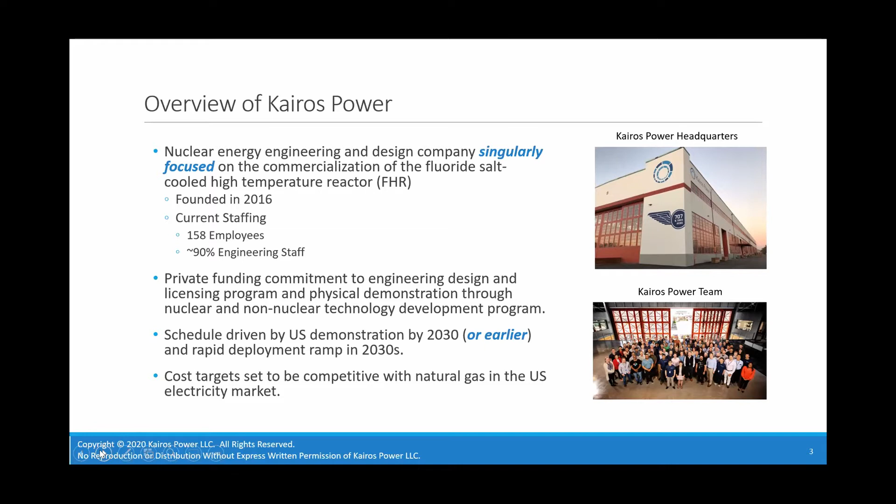Overview of Kairos. Pretty new company, founded in 2016. We've ramped up to 158 employees, very engineering focused. We're privately funded and schedule driven to deliver a demonstration plant by 2030 or earlier. We also are very cost conscious and realize that we're going to have to compete in an aggressive marketplace.

So Kairos is Greek for the right or opportune moment. And the founders recognized that this incredible peak of natural gas build out in the early 2000s was going to result in another peak of generation retirements, probably around 2035 or so. And we want to have a technology that's ready to answer that upcoming peak.

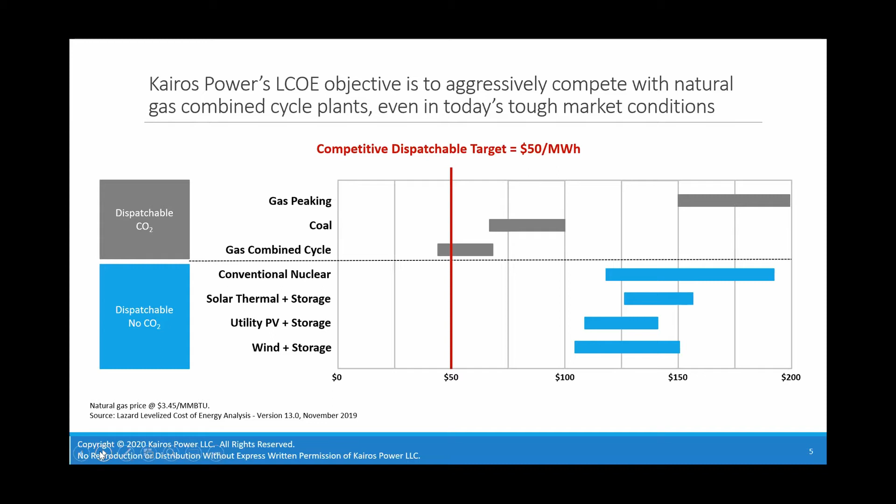We also realized that we have to be aggressive and compete with natural gas basically today. Things don't change in tough market conditions. So we're targeting at least a competitive dispatchable target of $50 per megawatt hour. And we think we can do maybe a little bit better than that, probably in the nth of a kind.

Our technology is based on particle fuel, TRISO, and FLiBe coolant. And I love this picture because that's my FFTF core before it was filled with sodium. But those two, the fuel and coolant combination, allow us to have a functional containment so we can have low pressure reactor vessels, low pressure systems, and we can avoid costly containment structures.

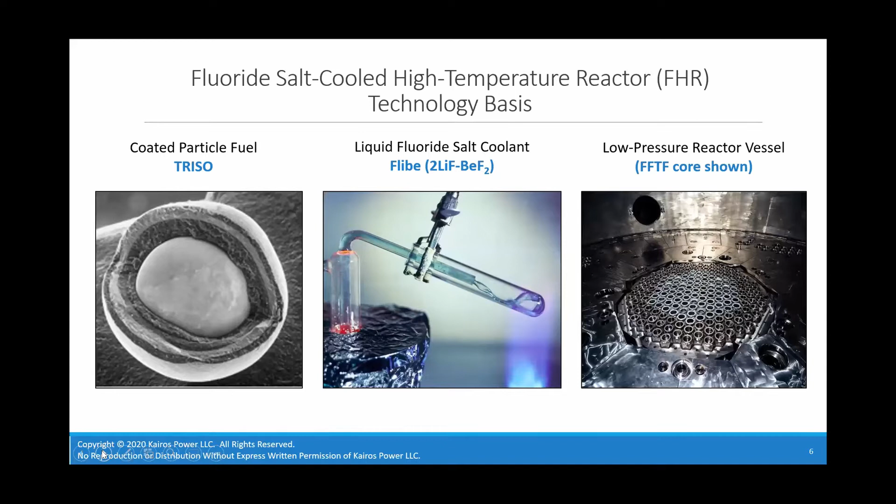We've done quite a bit of design work on the full-scale reactor, which would be 320 megawatt thermal, about 140 megawatt electric. We haven't really designed all the BOP yet, so we don't quite know all of the parasitic loads. 100 degrees C delta T with an outlet of 650, probably about 6 inches of water or so cover gas pressure, and we need HALEU fuel.

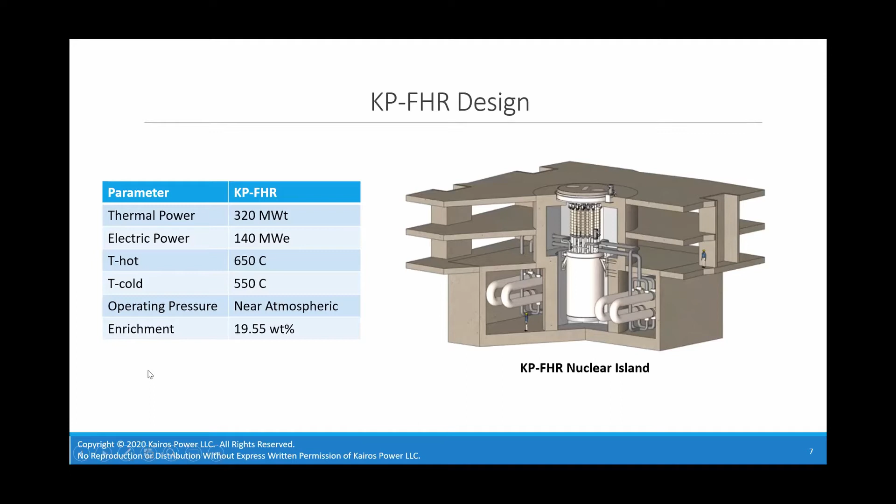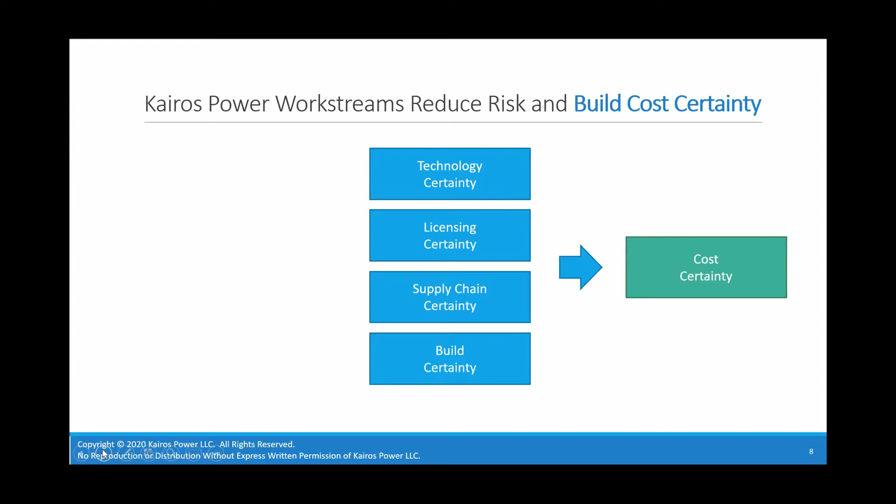So the main focus of all that we do is to build cost certainty. And in order to build cost certainty, we think we need technology, licensing, supply chain, and build certainty. And from that, we build our work streams at Kairos, which are the design, test, licensing, fuel development, salt development.

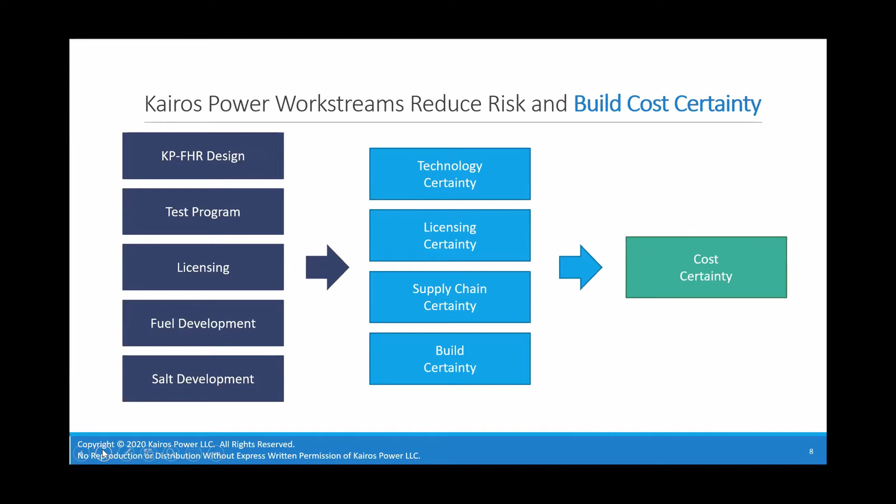So our system involves this sequence of non-nuclear development facilities: the rapid analysis prototyping iterative design lab, or R lab, salt handling lab, or S lab, the component testing facility, or T facility, which would be full-scale components, and then the user facility, or U facility, which we plan to be a full-scale replica of our commercial nuclear primary system, including the civil structural.

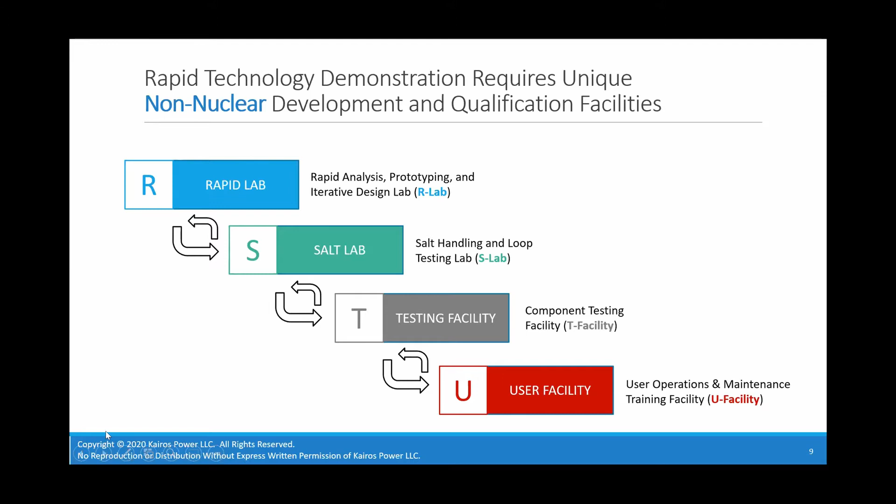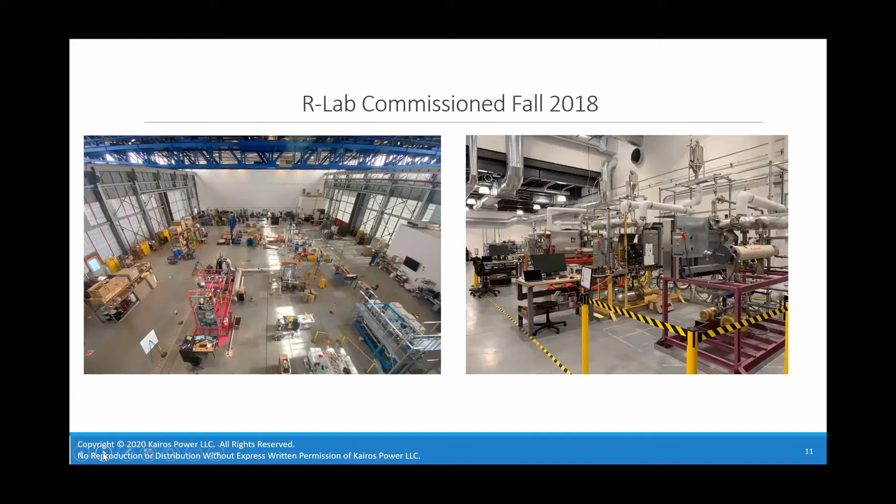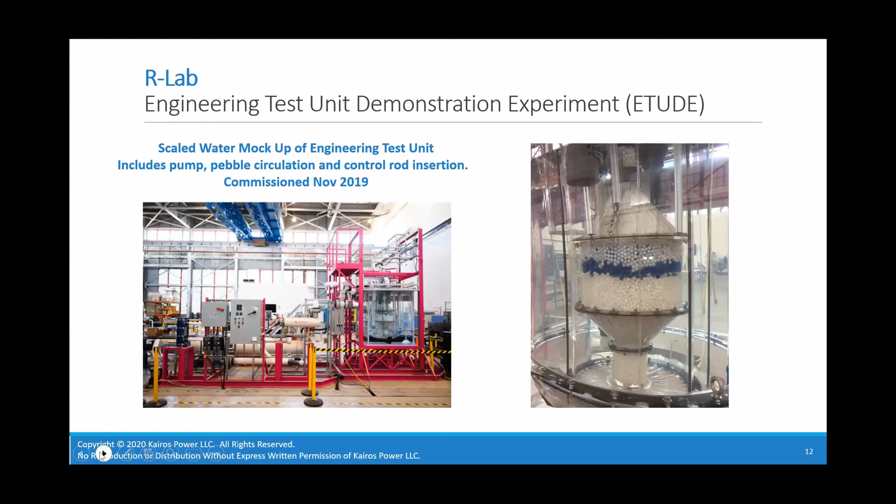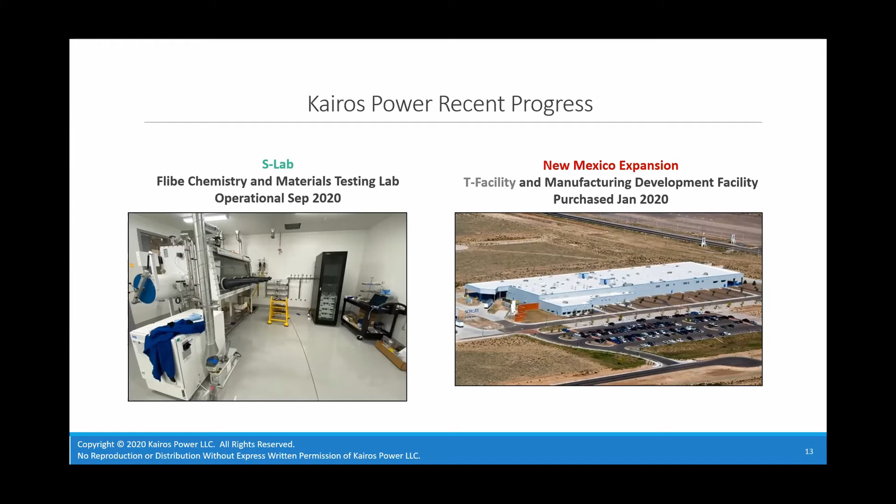So Kairos Power is taking a different approach to nuclear. We think nuclear has to be done really drastically different than it has in the past. And in the past, we've had long development cycles where you make a lot of paper that gets increasingly more complex and intricate and harder to change. You probably hook up with an EPC sometime after you've almost designed, close to finished. You find out that the cost estimate is undesirable. And so you do a power uprate to try and improve your dollars per megawatt ratio.

And then you go out to the field, finally, with paper that's really hard to change because you have a license now. And you find problems about how you can't build it the way you thought you could. And so we tried to break that down into small sprints, very near term, hardware focused sprints, so that we can really learn by doing, learn fast, learn cost control, and also to expose the real risks rather than try to contemplate what risks might be there and then track a whole bunch of them. Some of them come to pass and some of them don't.

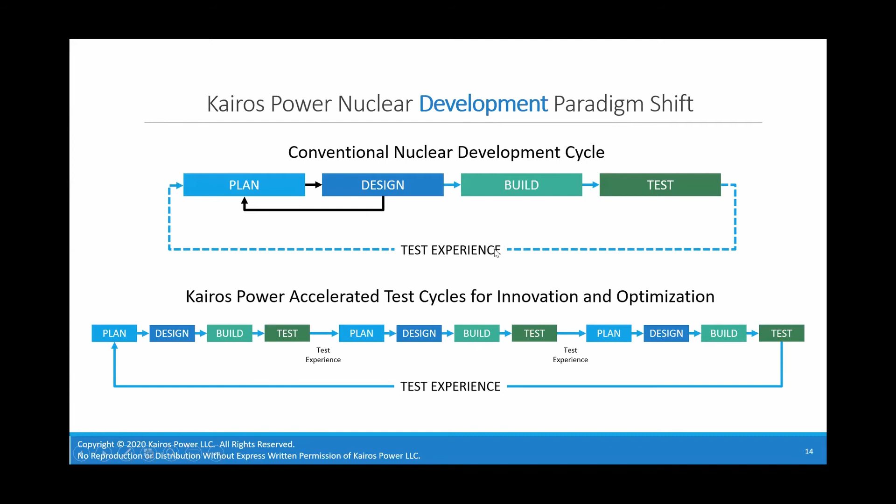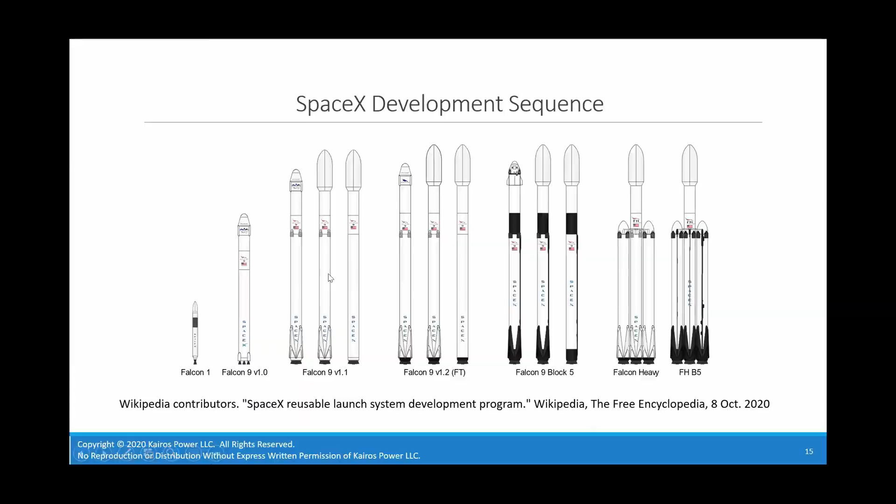a little bit. And this really helps us to develop our supply chain, to practice and improve our design and testing programs, to give us experience in operations of a large-scale FLiBe facility, and will give confidence in our ability to build and operate high-temperature FLiBe systems. So it's not really just a test of our technology and our components, but it's building muscle of our company and our people and our programs and systems, and how we can be successful in actually putting hardware into operation.

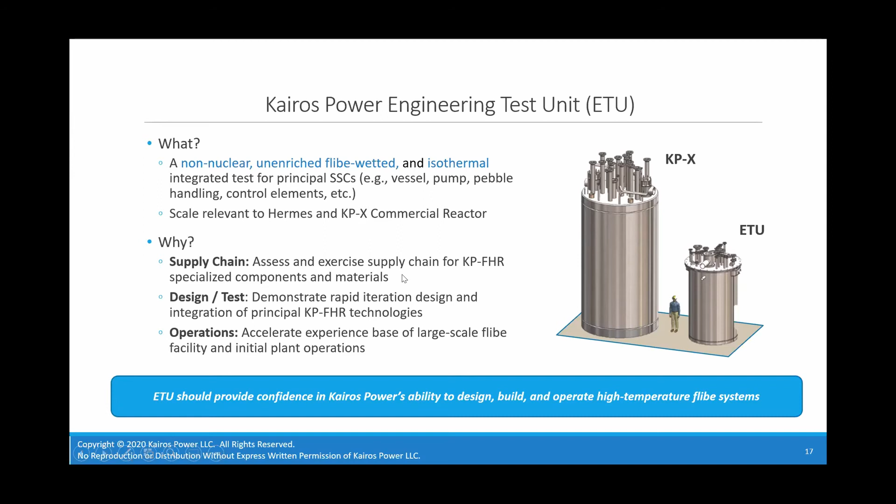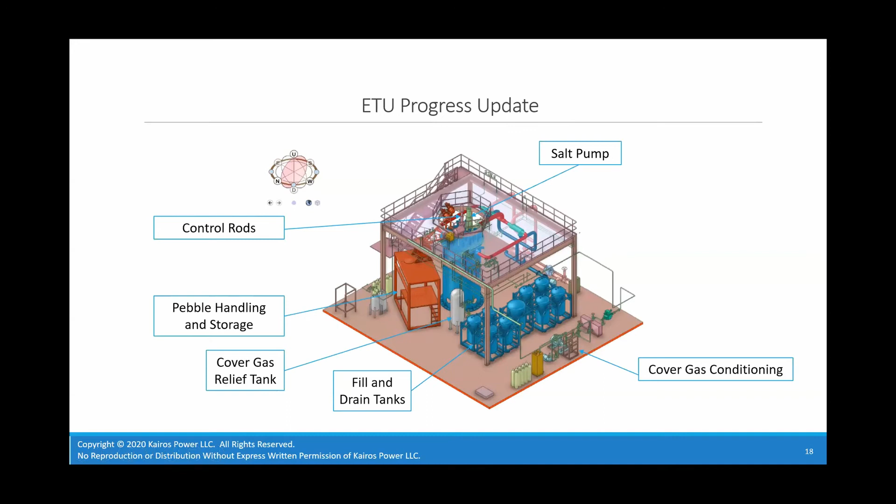The next sequence then is a non-nuclear U facility, which is the full scale of the commercial version of our plant, including all of the primary, which would be safety-related structural supports in the building. So this will really help us reduce that risk of going to the field and not being able to build what we had designed, and flesh that out and give confidence that we'll have build certainty. And then the next deployment would be KP-X, and X meaning whatever a customer wants, 2, 4 units grouped together.

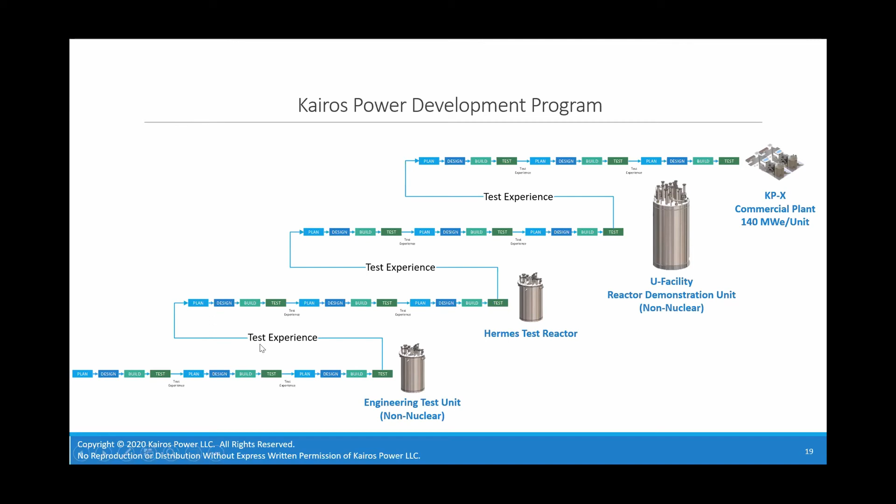So our schedule is shown here. We're in the middle of the engineering test unit. We've started design of the Hermes test reactor. We've done a lot of design on the full-scale KP-X, so a lot of this translates to just a smaller scale. Then we'll go into the U facility and then to commercial. Our intention is to have a commercial plant ready by 2030 or earlier. Hermes criticality, we're targeting about 2025. U facility construction would be in the 2025, 2026 timeframe.